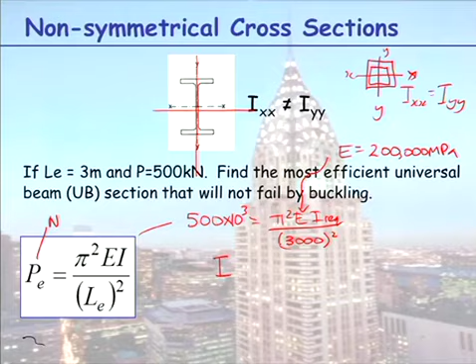We've been given, well, we haven't, but for a steel section, E is 200,000 MPa. So plugging this value in here, we then solve for our I, I'll call it the required I. So if we do, our buckle capacity here has to be greater than or equal to our 500. Rearranging that, you would get I required has to be greater than or equal to this huge number here.

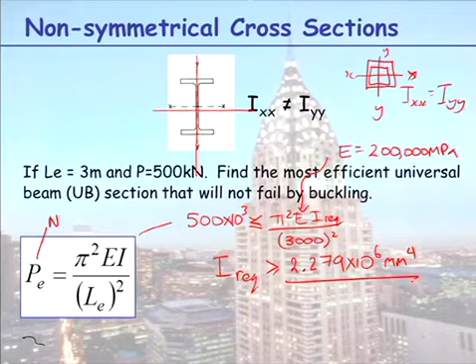Based on that big number, we would go into the section tables, which we'll have a look at here. So here are the section tables for the universal beam, and you can see your IXX and IYY values. The value we got for I required was greater than or equal to 2.2.

Now when you look at the I values, take note that at the top it says 10 to the power of 6 millimetres to the power of 4, so it's handy to work in units of millimetre. We basically want to find a value greater than 2.2.

If we go down both columns, the smallest I has to be greater than that. Looking at the two values of I here, you'll see IYY is a lot smaller than IXX, so we look for the smallest value of IYY that's just greater than 2.279, and that's this value here of 2.75.

This section is about 10 times stiffer about its x-axis than its y-axis, but you look for the smaller of the two, so the section you'd choose is the 200UB22. If we load this section any more, it will buckle about the weaker axis, the YY axis, the vertical axis in this case.

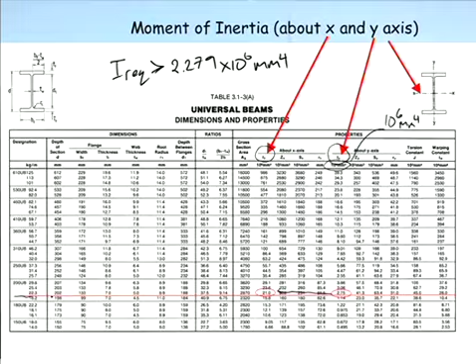That semester paper question, I won't do now since it's not terribly hard. How about I just give you the answers to work out yourself and explain how to do it. Here's a typical exam question.

This was the 2013 semester 1 paper. If you ask me about extra study for this subject, I'd go to Moodle, choose 3 or 4 past exam papers, print them off, and after finishing buckling, do the first 2 questions on both papers. This is generally the second question, so I'd pull that out and attempt it. Answers are provided, so if you get them right, you can say buckling's under control.

Now with this question, it says calculate the force in member AB and AC for the system subjected to a design load of 150 kilonewton. In order to calculate those forces, we want to know what the forces are in those members, so we would do a method of joints.

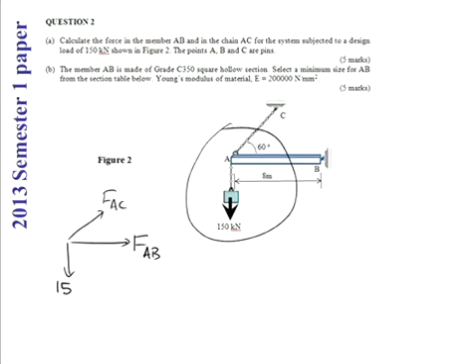We would isolate our joint as a free body diagram: force AC, force AB, 150. Remember, our free body diagram is in equilibrium, so to calculate the two unknown forces, you sum the forces in the x and y direction to zero and solve for your FAC and FAB forces. That's the first one done.

Then part B, the member AB is made of grade C350. If you can't remember, that number is at the top of your design sheet. In this exam paper you had to know how to use these design tables, and C350 means the yield stress is equal to 350 MPa. Knowing the yield stress, select a minimum size for AB from the section table.

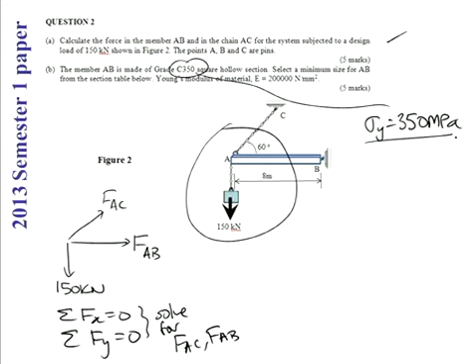Now, member AB, is it in tension or compression, everyone? It's in compression - it's being squashed.

So I'll leave it for you to do. You need to do a yield check and a buckling check. When you do so, the final member size you should come up with from your tables is a 125 by 125 by 4 square hollow section.

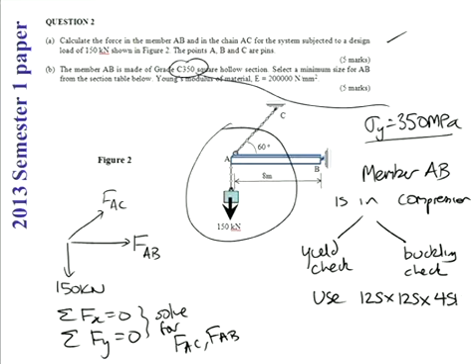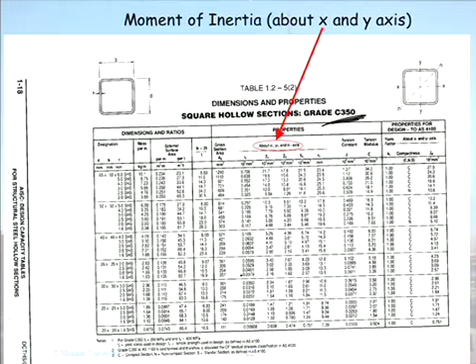You would come down here and find your area when checking for yield, and your moment of inertia when checking for buckling. So give that a go. If you have any issues, we can help you at the help desk, or you can come up before the lecture. Okay, that brings us to the end of our topic on axially loaded members.

And now it's time to move on to my favourite topic - members in bending. Once again, you have learnt so much in this subject. I need to tell you this so you don't think this subject's boring and that you haven't learnt anything. You have learnt so much.

You now know about loads. You can understand conversations about dead, live, and wind loads. You know how to calculate reactions, and you know that calculating reactions is the first step to calculating internal member forces. We've looked in detail at trusses, using the method of joints and the method of sections to calculate the forces. We call them that to make it sound like we're teaching you something, but really the method of joints and method of sections are just free body diagrams and equilibrium.

You're just isolating a different free body diagram system, and you're just using your equilibrium equations.

This week in the practice class, you will actually get a chance to practice designing members. You'll learn how to size them up based on failure by buckling or by yielding. You can yield in compression, remember, if your member is really short.

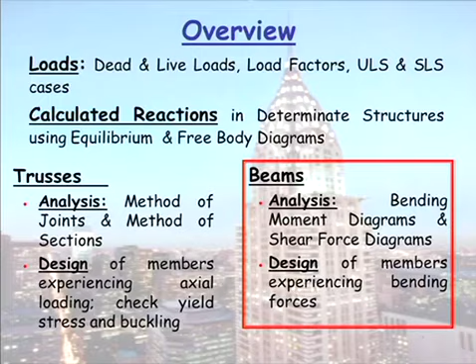So now we are going to move on away from trusses and move into beams. Beams are the most common structural form. So we are in effect going to do the same thing: we're going to learn how to analyse a beam, and then we're going to learn how to design a beam.

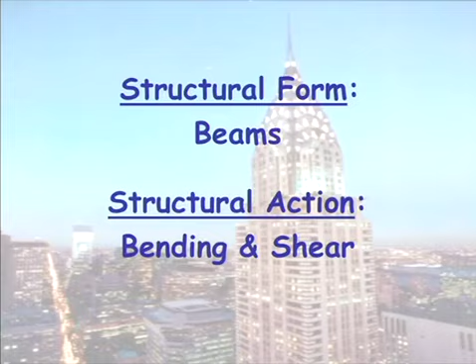So our structural form is beams, and our structural action is now - a beam is a member that carries lateral load. So our beam now is curving. Our structural action in trusses was stretching or squashing. Our structural action now is bending, is curving.

So our member is curving, and we now no longer have tension or compression in our member. We have bending and shear. I'll say more about that in the next few PowerPoints.

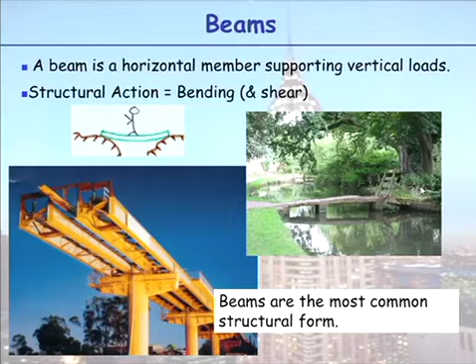So beams are the most common structural form. Here you have the simplest type of beam, just a bit of rock spanning over a river. So beams, all our members that carry lateral load are beams.

We have what we call simply supported beams, which you've already met when you did your reactions. We can then have continuous beams that run over internal supports. We can have cantilever beams and fixed beams. So they're all beams if they're carrying lateral load, and they're all deformed and curving in some way.

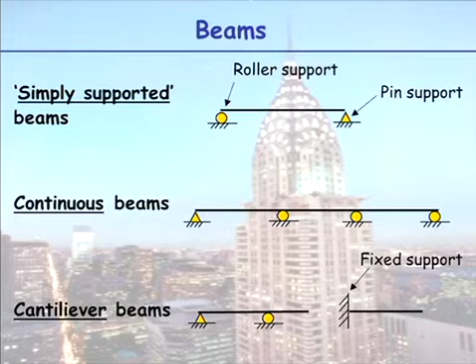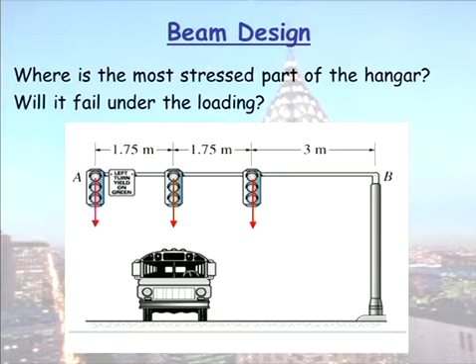So what we need to find out now is, where is the beam - in this case a cantilever beam - where is it being stressed the most? Because where it's being stressed the most is where it will fail. So we need to know what that maximum stress is in order to prevent failure.

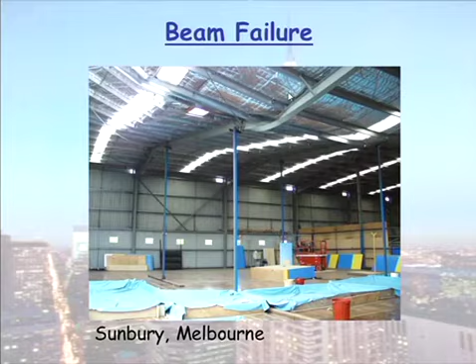So just reviewing again, we're familiar with axial forces in trusses, but what actually is bending and what is shear? Shear is the internal action trying to slide one part of a solid over another - if you look it up, that's what shear is. But a way to remember shear is it causes distortion.

Let me get the document camera going here. What I have here is a bit of fly screen between two fly screen edges. It has a square grid in there, and I just wanted to show you what shear is.

So now, if I hold one end and I apply vertical load down the other side, what I'm getting is a shearing action, not a bending action. So I just want to show you, there is my fly screen grid. When I apply two vertical forces that are not in line with each other, that cause a couple, you will see here the deformation.

Can you see it's distorting rather than curving, which it won't because it's a bit of fly screen, but you can see that distortion there. So now instead of having rectangular shapes or square shapes, I've got diamond shapes. So we get that sort of distortion in beams.

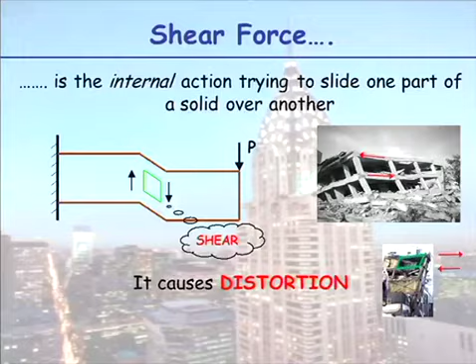So what is bending moment? We're clear shear causes distortion. Bending moment is the internal action which curves a beam.

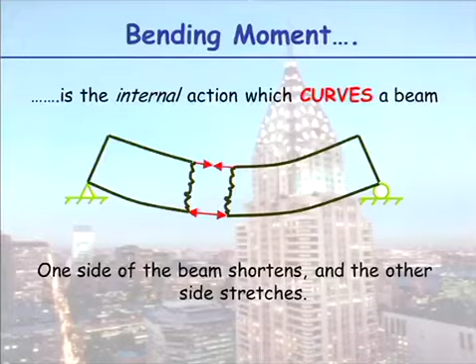So bending moment, when a beam curves, the bottom of my ruler here, is it stretching or squashing? It's stretching, so it will be in tension. And the top of my ruler, is it stretching or squashing? It's squashing. So the top is in compression and the bottom is in tension. One side shortens, one side stretches.

Bending moments and shear forces are very important because it's from these that we get the stresses, the bending stresses and the shear stresses which develop in beams. Of the two, we are going to concentrate on bending moment because it's the bending stresses that we use to design. Shear stresses, if you continue to do civil, you'll look at next year. Now we're going to focus on bending stresses.

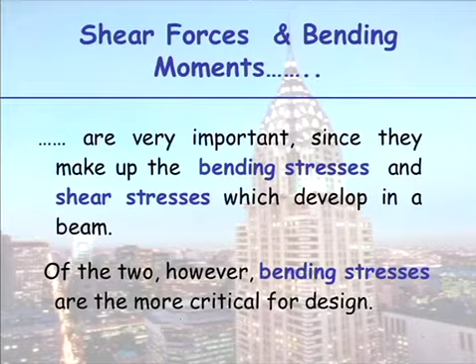Okay, so going back last week, we learnt when a member experiences axial load... bye-bye gentlemen, hardly worth coming all that way, for such a short period of time, in this hot weather.

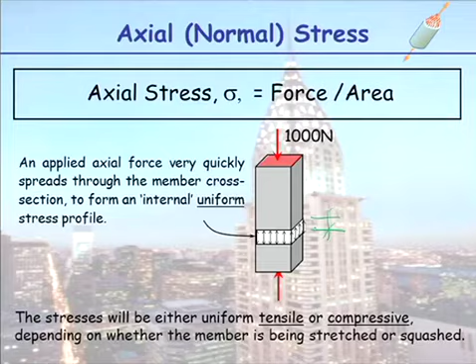Axial stresses: truss members and columns experience a uniform stress distribution, either tensile or compressive. However, when a member bends, as shown here, we've agreed we get squashing at the top and stretching at the bottom, so we no longer have a uniform stress distribution. So for an axially loaded member, we had this uniform stress distribution, P on A. If we have stretching on one face and squashing at the other, our stress distribution is no longer uniform. We define it to be linear - it's a triangular stress distribution.

So now, because our section is stretching and squashing, beams are best made from materials that can transfer both tensile and compressive stresses. What do I mean by that? Stone, concrete - not good. Materials that can transfer both: timber, steel, and reinforced concrete. The reinforcement is in there in order to transfer the tension forces.

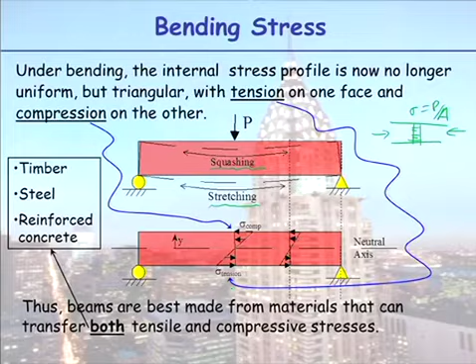So now you understand, or it's been introduced to you, why in the olden days, with stonework as the most common building material - they would just go to a stone pit and pull out all the stonework, it was easily sourced. Stone, however, we know cracks under tensile stresses. So did they build their structures as beams? No, they built them as arches. Big doorways, aqueducts spanning rivers, big churches, cathedrals.

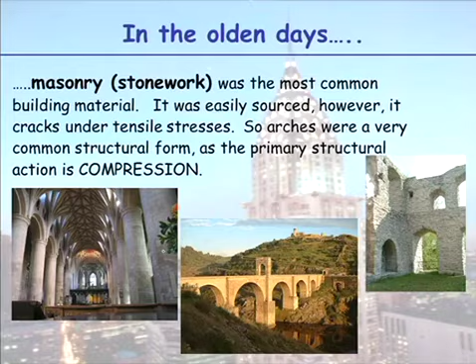It was built 125 AD. It still holds the record as the largest unreinforced concrete dome at 43.5 metres - not such a record really, because you wouldn't build without reinforcement nowadays, but it still holds the record. The dome thickness varies from 1.2 metres at the top to 4.6 metres up the sides. They built to last in those days.

So the Romans actually invented concrete, because it was a low-cost alternative to bringing in the masonry and the stonework. So the Romans were smart. The Greeks were smart as well.

But how did the Greeks build? Have you ever seen a Greek arch? You must have done some history and some art and some travel - Greeks didn't build with arches. They used beams and columns. You can see here this beam, it's a lintel beam, and columns.

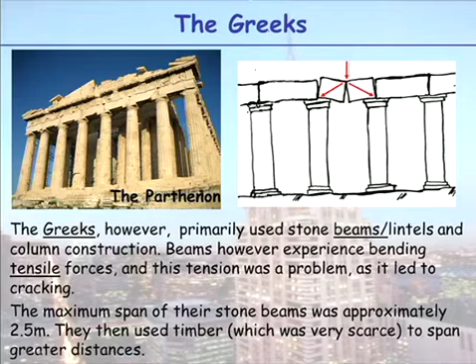And they used timber sparingly. This structure would have been covered in timber, of course, but they didn't have many trees in Greece because they'd cut a lot of them down already. So they used timber, which was very scarce, to span greater distances. Otherwise, that's why Greek structures have a lot of columns. It looks good, but the Romans found a way around it by building arches.

So just a bit of history there. Let's go back. We now need to calculate our shear forces and bending moments. So how do we do it? Am I going to teach you a wonderful new method? I'm going to teach you how to apply equilibrium and free body diagrams yet a different way. Is it actually different? No, it's not actually different, it's exactly the same. So you could walk out now, and if you really understand equilibrium and free body diagrams, you could do this on your own. But since I'm here and you're here, we may as well go through it.

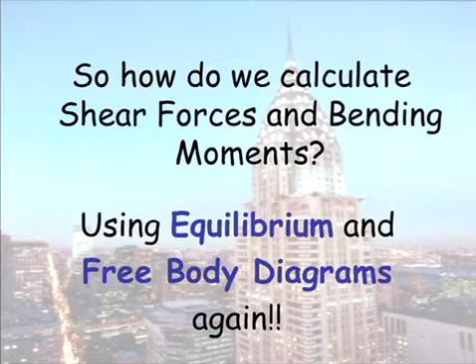So we have agreed, going back to trusses, that the structural action in our trusses was axial tension and compression. So when we drew our free body diagram and cut through our members, we only had... guys, stop chatting, or chat quieter if you're going to chat, okay?

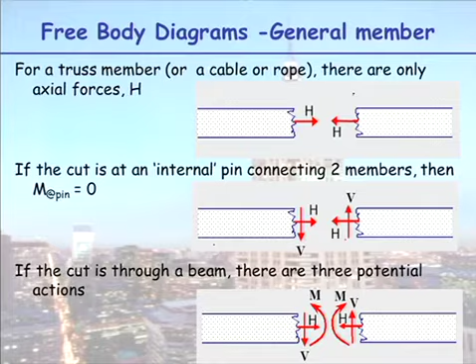Our structural action, when we cut through, we only had one unknown at each member. Now even before we did trusses, when we looked at internal pins, which you did in the quiz last week, when you cut at an internal pin, you have a potential horizontal and vertical force. When you, however, cut a beam, you have three potential unknowns: a moment, an axial force H, and a shear force V. So three unknowns at the one cut. So for a beam, the internal forces in general are axial, shear and bending.

So here I have my free body up the top, and down here I create my free body diagram by cutting my closed loop boundary, having it cut through the member, and thus in my free body diagram I have three unknowns at the cut. So when you're dealing with beams, you make one cut, and at that one cut you have your three unknowns.

When we were dealing with trusses and used the method of sections, we could cut through a section like so, and we would expose three unknowns, but they were all axial loads in the members, in three different members. Shh, I said sound travels really well in this room. It travels down really well and up really well, so I can hear you. So if you're going to talk, just quiet, well, why don't you just wait 25 minutes and talk later?

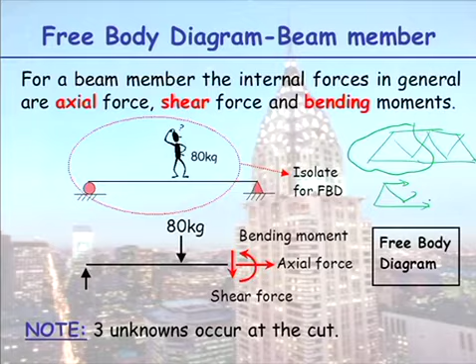Okay, so we have three unknowns at a cut. How do we solve for those three unknowns? Nothing new, we're going to use equilibrium. But before we do that, we need to confirm our sign convention. And this is where people get slightly confused. Now, when we use equilibrium, we use our Cartesian positive sign convention: up is positive, to the right is positive, anti-clockwise is positive.

However, if my beam is bending like so, assume I've got my chin still on it, I'm just holding it down here, a positive bending causes a beam to be happy - smile, positive. So if you asked, what's the bending moment in this beam? Just by looking at it, you know it's a positive bending moment. So anything that causes hogging - we call this hogging - is sad, is negative. So think of sad shape, negative; happy face, positive.

So that's the sign convention for what the internal moment is. Is it a positive moment? Is it a negative moment? If it looks like that, it's positive because it's happy. If it looks like that, it's sad because it looks sad. So I have a cantilever here. This is the wall, I'm grabbing it, I'm applying a point load. Is the bending moment in my cantilever beam positive or negative? Because it's sad, okay? As simple as that.

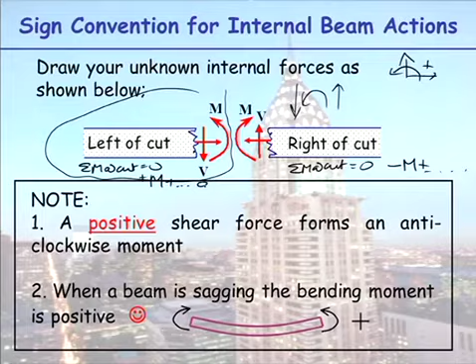We'll do an example with numbers anyway. Just don't confuse the two.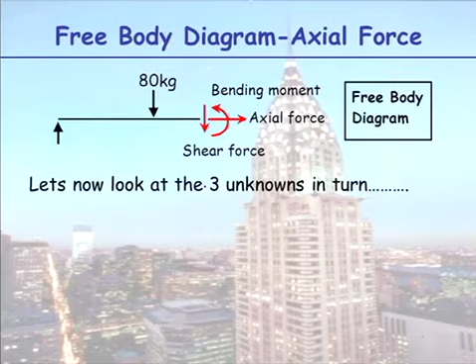So how do we calculate these internal forces? We have our three unknowns - bending, axial, shear. It's obvious how we calculate them. To find axial forces, sum all the forces in the x direction equal zero, we solve for H. When you look at your system, if you have no axial force applied, you can assume everything's zero - all your reactions will be zero, so there won't be an axial force in the system.

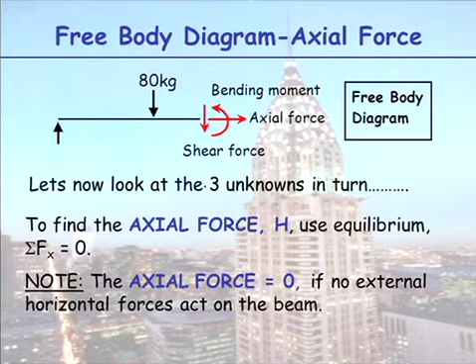So take note now, I want to trick you in the exam, on the test - I just put a little horizontal force in there because you forget about it. But it's not difficult anyway.

To find shear force, we sum all the forces in the y direction, equate them to zero and solve for V. Following on, for the bending moment, we take moments. Just like when we did the method of sections, there's a best place to take moments. With method of sections, it was where two of your unknowns met. Here, take moments at the cut - that's usually the easiest place to take moments.

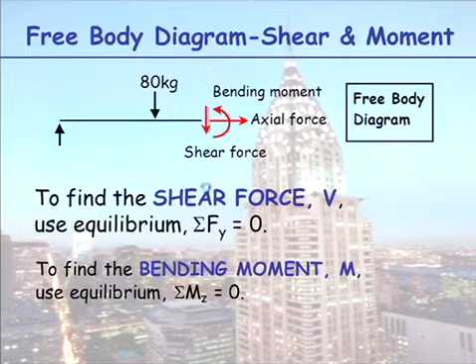Again, I'll do problems - and here's our first problem. Determine the internal forces, shear, axial and bending, 6 metres to the right of point A. Before we do that, what do we have to do? We have to calculate our reactions.

So by calculating my reactions here, I am considering free body diagrams, but my free body diagram is in effect of the entire system. Looking at reactions here, all the forces in the x direction equal zero. Because I had my triangle at A, that represented a pin support - a pin support is me grabbing my ruler with my two fingers, I can't pull it sideways and I can't force it up there. So there's an unknown horizontal and vertical, so I have an AX value. This time I have a 10 as well applied to the right, so therefore my AX is equal to minus 10 kilonewtons - it opposes it.

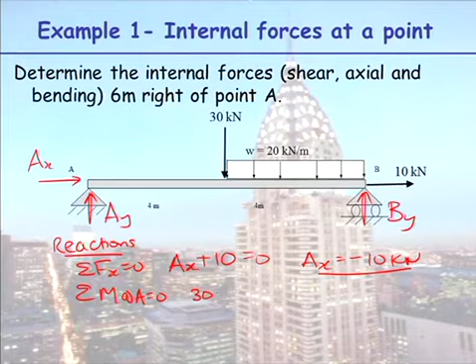I will take moments next. Where shall we take moments? I usually take it at the left support - let's take moments at A. So taking moments at A, remember AY causes no moment, AX causes no moment. I have my 30 kilonewtons, my perpendicular distance is 4. Clockwise or anti-clockwise? Clockwise, so it's negative.

This UDL load here, I have an equivalent point load of 20 times 4 metres, which is 80 kilonewtons. So my force here is 80, and when we apply this equivalent, we apply it in the middle of the actual uniformly distributed load, so that's 6 metres away. So I multiply that by 6 - that's also causing clockwise, so that's minus.

Does this 10 kilonewton here at B cause a moment? No, because you can trace that arrow back to A, so it has no perpendicular distance. So our final force is By. It's 8 metres away. As drawn, it's going anti-clockwise.

So from here, we can solve for By, and that's equal to 75 kilonewtons. And now all the forces in the y direction equal 0. AY minus 30 minus 80 plus BY equals 0. So AY is equal to 35 kilonewtons.

So you're all sitting there going, yeah, we've done this before, I get it. We're going to do exactly the same thing to calculate internal member forces.

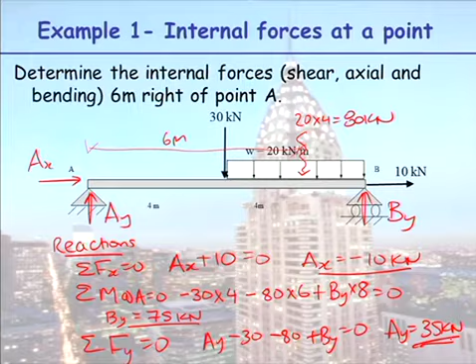So the question is asking us to determine the internal forces 6 metres to the right of point A. I'll come over here. We calculated that to be 35, 10, and 75.

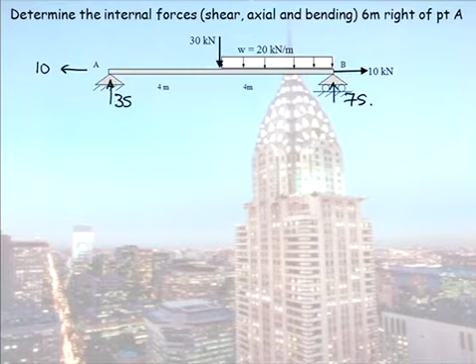So that's where our free body diagram has to pass through, 6 metres. So in drawing our free body diagram, we're going to cut through where we want to know the moment. So we can either deal with that free body diagram to the left or a free body diagram to the right. I'll do it both ways, show you we get the same answer, so you can see that all looks good. And then it's up to you which free body diagram you want to deal with.

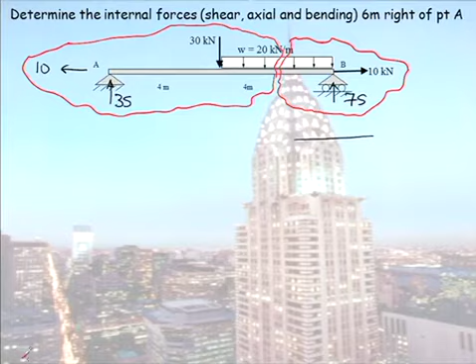Just as with the method of joints, I'm always saying draw your joint, draw your free body diagram. Actually, I might spread them apart a little bit just to give ourselves room to draw those internal forces. So I'm just splitting them a bit.

So I said at the cut, draw your moments at the cut so they make a happy face. That moment there will cause a happy smiley face, and that moment on the other side will cause a happy smiley face. I've got 75, I have 10, I'm cutting it at 2 metres, so that's 20 kilonewtons per metre. Now axial forces always have to be tension, and the shear forces, we said, as a couple, create clockwise rotation. So it would be up on that side and down on that side.

So we have V, H and M. Can you see I've drawn them equal and opposite? So when effectively we join it all up, it's all in equilibrium.

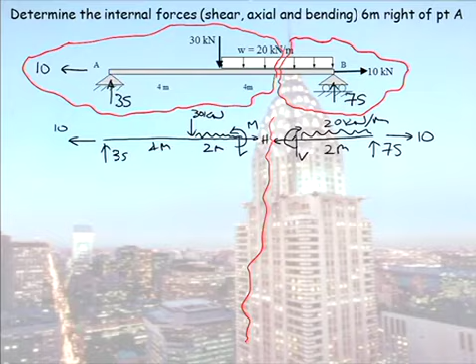So finishing our free body diagram here, 35, 10, I've got 30 kilonewtons here. That's 4 metres, 2 metres, and we all know the value of that UDL load, so I'll just draw it in. So I have 2 free body diagrams, and both are in equilibrium. So let's actually calculate those 3 forces both ways and prove to ourselves that's the case. I'm going to go blue.

Okay, so let's work with free body diagram 1. Anything new? No. Equilibrium, all the forces in the x direction equal 0. On my free body diagram I have my 10 applied, plus h equals 0. So my horizontal force is plus 10.

What does that plus mean? It means it's in tension. If I now go to free body diagram 2, all the forces in the x direction equal 0. I have my 10 applied this time, minus h equals 0, and lo and behold, h is 10 kilonewton.

Yes, I've drawn it to the left in one and to the right in the other, but drawing it away like that indicates tension, and they're both positive, so they're in tension. So if that structure, say, was a beam and it was a big rusty beam and it had rusted through there, and I said, I'm going to cut it in half, could you please hold both halves while I cut it in half and then stick it back together? You would be, it's in tension, so you would be pulling inwards with both hands to hold it together. That's what the beam's doing.

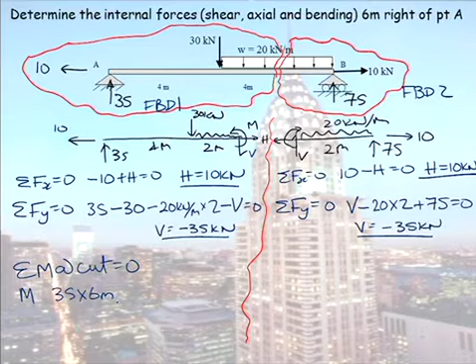Then I have my reaction 35, that's acting 6 metres away. At the cut there, that force is applied is causing clockwise rotation. So put your finger at the cut and go, okay, I can see it's causing clockwise rotation, just like you did for reactions. So that will be minus.

Then I have my 30 kilonewton point load, and that's times 2 metres, plus or minus? Plus, cool. And then we have plus our 20 kilonewtons per metre times 2 metres is my total load, times a lever arm of 1 metre away. Can you see if I put an equivalent, I'll just draw it in another colour here just so you can easily see it. If I draw my equivalent point load here, can you see it's acting there? We put it in the middle, so that's 1 metre away from the cut.

Which blue did I use? All of that equals 0, and by doing that we get a moment of 110 kilonewton metre. It's a positive moment. Do we expect it to be a positive moment? Yeah, because we've got a point load down and a UDL load down, and our beam is curving like so, and it's happy. So yes, we expect our moment to be positive.

If you had got a negative value out of there, okay, then based on that sign convention you'd be wrong. It's possible if you drew your moment round the other way, a negative is just telling you then that it's opposite to the way you drew it. So just memorise which way to draw it.

So let's just finish this one off. We're taking moments at the cut this time. Our moment as drawn here, it's clockwise, so it's minus M. Then we have plus 75 times 2 metres. And then we have minus 20 times 2 times 1 equals 0. And from all of that, our moment is 110, which is what we'd expect it to be.

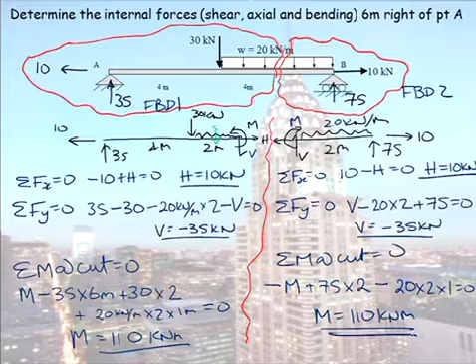Of course, things can look a bit more horrible. This would be what I call the scare question on the exam. Let's scare them. But if you remain calm and say, I know, I just have to apply equilibrium and free body diagrams, you're okay.

So let's have a look at this system here. Now this system is drawn, if it had, there's an internal pin there, there's a pin support here, there's a pin support here. If it had a point load applied up here at the joint, this would be a triangulated structure and all the internal forces would just be axial. However, because the forces now are not applied at the joint, because that was the assumptions of our truss method here, can you see here my member is bending?

And with a load here, this member is bending. So as soon as you can see some bending, some curving happening, you know it's a beam. Up here, can you imagine there's any curving in here if the point load's applied at the middle? No. So this, to calculate these two forces, you would use the method of joints. Okay, we want to know those forces.

I'm not going to calculate those reactions again. This is the problem we did back with internal pins. So let's say we know what our reactions are. The question is then asking you,

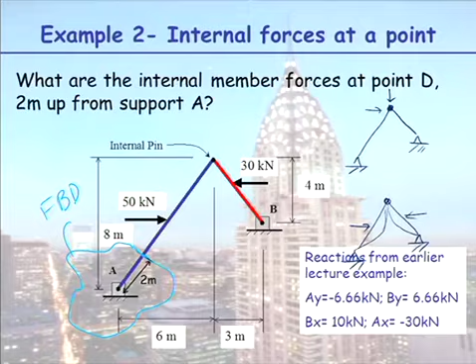what are the internal forces here 2 metres up? So if you want to know the internal forces there, you know that is where your free body diagram has to cut. Now, it's at an angle. Are we going to freak out? No, so coming over here, there's my free body diagram.

So I'm going to draw everything in my closed loop boundary. And as I said, the reactions we calculated a couple of weeks ago was 30 to the left horizontally and vertically down 6.66. Now at the cut we have, it's a beam, an axial, a shear, a bending.

So we now need to draw these as an axial, a shear and a bending. They are at an angle now, but the axial has to be an axial force, the shear perpendicular to the beam, and our bending. So this is our system, and again you were given enough information to work out that angle. So I'll call this now H, V and M.

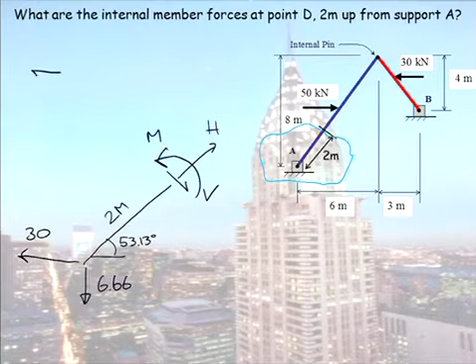I could take that whole thing, I won't rub it all out, I could take the beam away and just say I have 5 forces here. Well, 4 of them are forces and 1's a moment. So I could just go up here and say, okay, what I've got is this system of forces here. Doesn't matter what the structure looks like, forget about the structure. That system of forces is in equilibrium.

Tell me what those 3 unknowns are. Because you have 3 equations, you can solve for your 3 unknowns. So let's start off taking moments.

So admittedly, we have a slight complication here in terms of what's the horizontal and what's the vertical distance. But you can work that out because you're smart. So that distance in there would be 2 cos 53, and that would be 2 sine 53.

So now, when I come and take moments at the cut, remember a moment is a force times its perpendicular distance. So I have M first of all. Now my 6.6 vertical force there is a vertical force.

So what's the perpendicular distance? It's 2 cos 53.13. Remember I said when we were doing reactions: vertical force, horizontal distance, horizontal force, vertical distance. Now, as drawn, clockwise or anti-clockwise? Anti-clockwise, so that's plus. And now I have the 30 to consider.

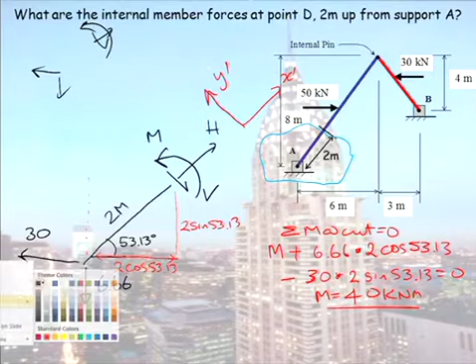just rotate our axes round. That's the easiest thing to do. The x-x axis lines up with h. Sorry, the x-dash axis lines up with h, and the y-dash is perpendicular. So now, taking moments, not taking moments, I'm going to say all the forces in the y-dash direction equal 0.

Now, this is just a bit of trig. You are going to resolve these reactions here into that x-dash y-dash axis. So that angle is 53, so you've got to be good at trig. I'll just write 53 here instead of 53.13. Now which angle in here is 53, the top one or the bottom one?

Bottom one, I heard one person say. I'm going to assume you are all thinking the same thing. Okay? So in the y-dash direction, what have I got? That's my V direction, so I have minus V because it's going down. Now when I come and look at my 30, that has a component in the y-dash direction. That's the sine component, and it's going up, so it's positive.

When I look at my 6.6, it's this force here. Can you see where I'm waving my little marker? So that's going downwards, so it's minus 6.66. Is it sine or cos this time? Good. Cos 53, all of that equals 0. So from that we can calculate our shear force.